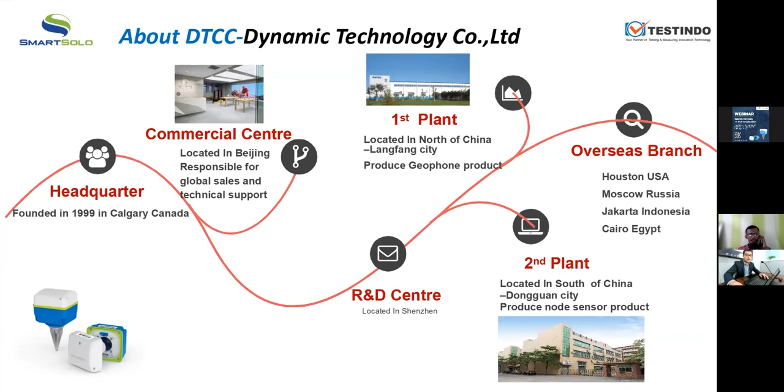The next page is about our product. What we supply is called nodal seismic sensor, and it contains different kinds of node sensors. The first one is IGU-16HR, a single 1C node sensor.

That is available to connect with external geophone stream products to match different kinds of terrain, like marsh or even shallow water. The last one is IMU3C, a new product we just launched this year. It also connects to the external 3C geophone stream product, which is popular for geotechnical survey areas.

The advantage of SmartSolo is they have three significant features. The first is being highly reliable compared to conventional geophone stream products. The second is low cost, much cheaper than the geophone stream product, the first generation seismic sensor product. The third is better HSE performance.

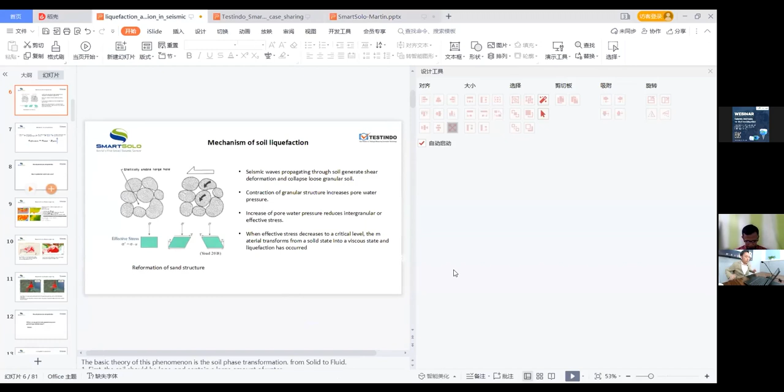Hello everyone, hello my friends in Indonesia. My name is Alan. I'm very glad to be here today to deliver my speech about introduction to seismic methods in soil engineering and structural health monitoring.

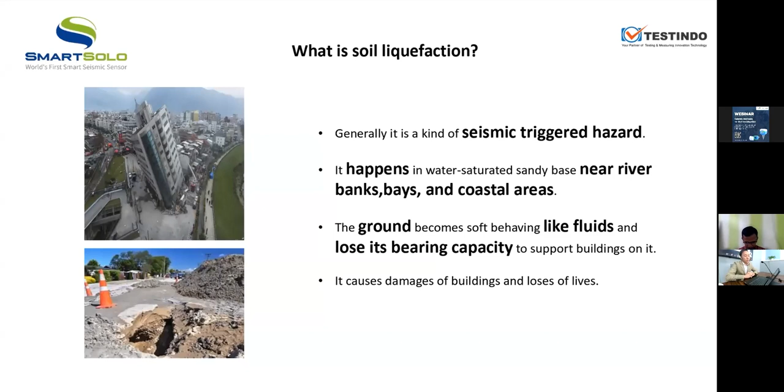Here are the consequences of liquefaction. Just imagine when you stand on the ground, and the ground suddenly becomes fluid like water — you will lose the support of the ground. What happens to you is what happens to all the buildings or structures on the ground. Here are several typical consequences led by liquefaction, like sand boil, flow failure, ground settlement, ground oscillation, and lateral slide. All these consequences lead to bad results for the structures on the ground.

So what is the mechanism of soil liquefaction? There may be many factors that affect soil liquefaction, but the mainstream view is that the main reason for the occurrence of soil liquefaction is that the effective stress goes down, and that it can be caused by triggering, like seismic waves.

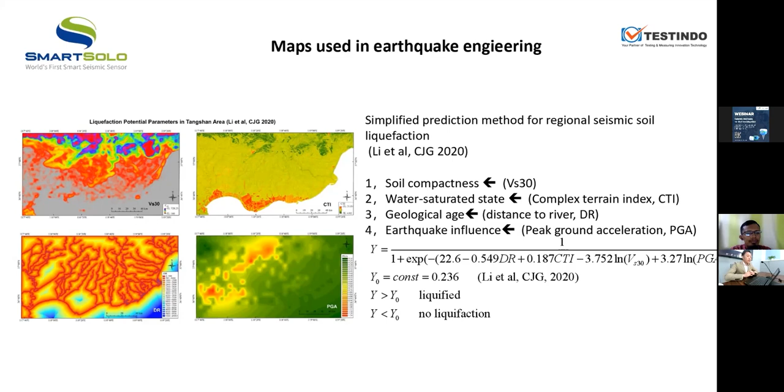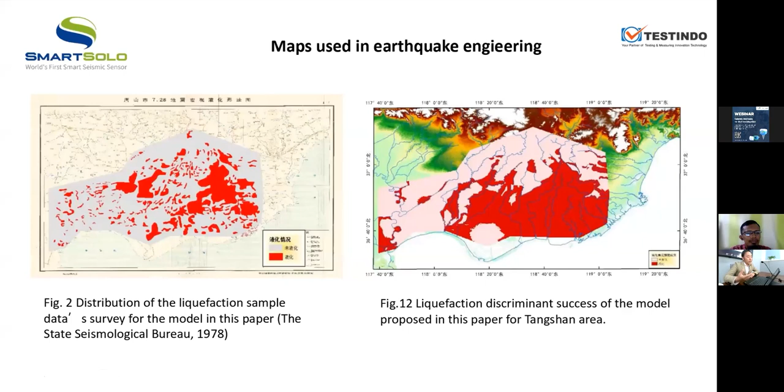Here's the result. The left picture is a study about the earthquake that happened in 1976, which caused a vast area of liquefaction. It represents the area which has experienced liquefaction. The right picture is calculated by the author with his methods. We can see clearly that the area predicted by the author complies with the real situation. So this method works well for us to predict the vulnerable area.

Here is another result. Here is a difference: the right figure is the real situation. The left figure is a prediction map calculated by the author with his method. We also can see that the prediction result corresponds well to the real situation, which again proves that his method is effective and efficient.

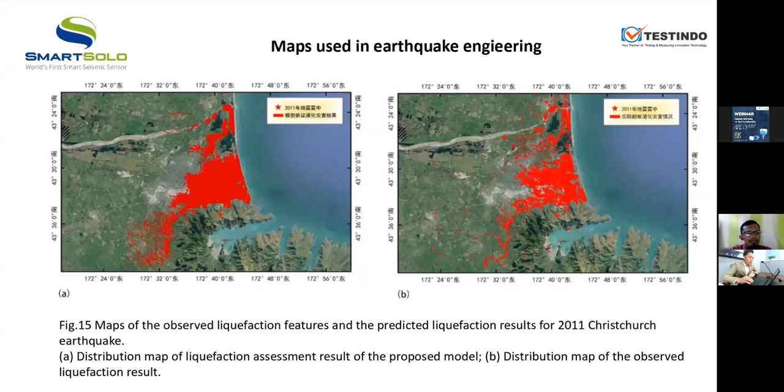So we already know that the author uses 4 parameters to predict the vulnerable areas. So how can we get these basic parameters used in generating prediction maps? My answer today is seismic. Here is a little derivation of the equations.

The first equation we have shown is that effective stress is equal to total stress minus pore pressure. And in the second equation chain, the very last one, tau means the shear stress. The capital G means the shear modulus, and the E means the shear strain. The mu is the Poisson ratio. So the shear stress is equal to the Poisson ratio times the effective stress.

Here we can conclude that the shear modulus is directly related to the effective stress, and that is influenced by the shear velocity Vs. So the variation of Vs can directly reflect the variation of the strength of the soil. It means if we know the distribution of shear velocity across an area, we'll have a good understanding of the strength of the soil.

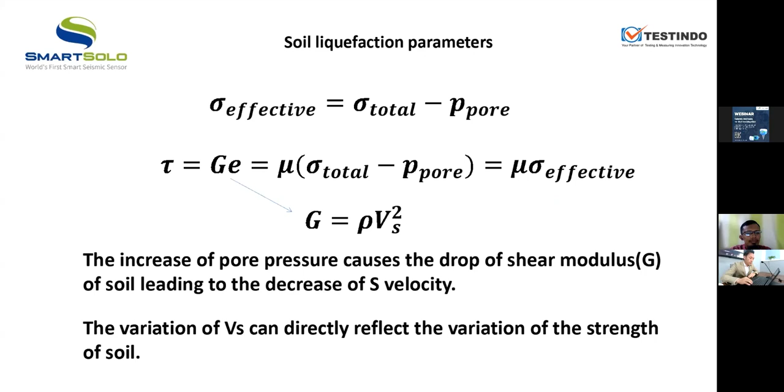Next, I will introduce some conventional methods to acquire soil shear wave velocities. Here are the conventional methods to measure the sand. We also call them in situ tests. We have many types of in situ tests like SPT, CPT, DMT, PMT. I think these methods are familiar to civil engineers.

To be honest, I'm not familiar with these tests, but the basis of these tests is to come to a specific spot in the field, drill a hole, put the equipment in the hole, measure that physical quantity, and then derive the parameters we want.

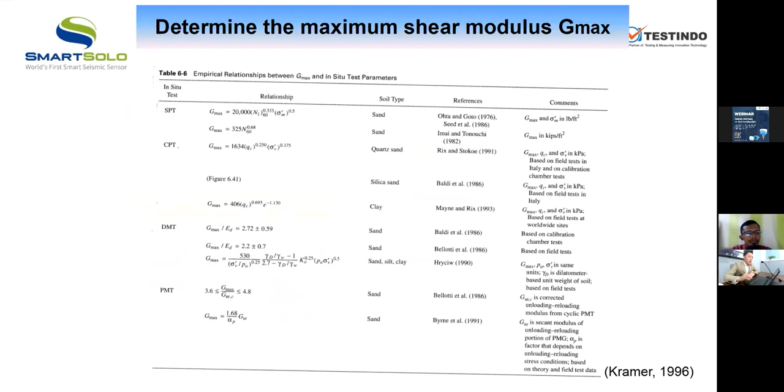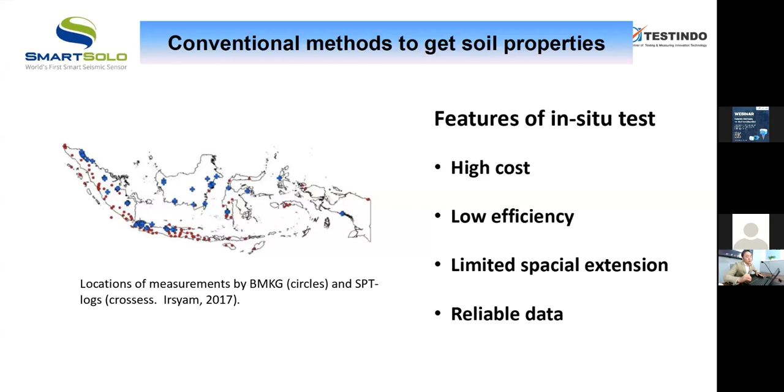The last one is reliable data. That's the most beautiful of the in-situ test features. The in-situ test can provide us reliable data, and that is very useful for us to verify the seismic profile. So what comes to my mind is that combining in-situ tests and seismic methods provides an efficient and cost-effective way to do soil property investigations.

Here is my economical equation. If we do some in-situ tests in some particular spots, that can provide quality control. And in other areas, we can implement large area nodal seismic investigation that provides spatial extent. Combining these methods together, we can have a cost-effective soil property survey solution.

Next, I will introduce mainly the seismic methods for acquiring soil properties, like the P wave velocity, S wave velocity, and also the layered model. I will mainly focus on the principles of these methods, and later my colleague Wei Hongyu will introduce some real applications. So I have three methods to introduce. First, surface waves.

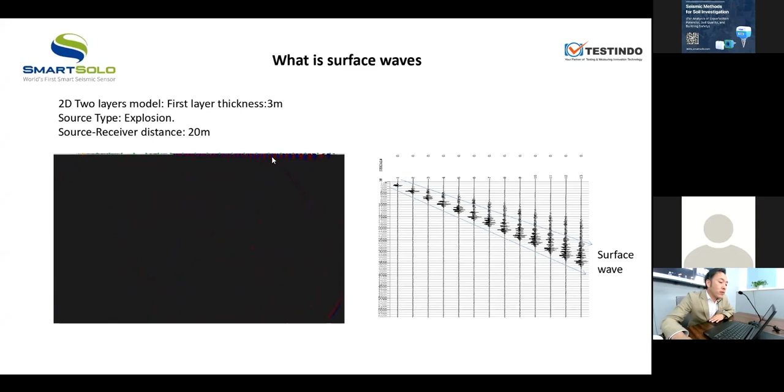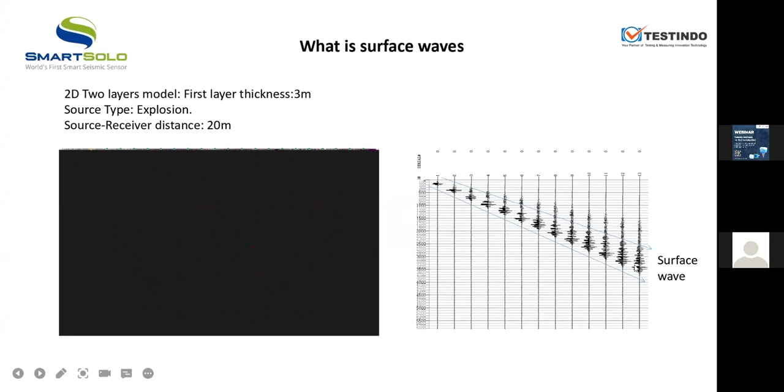The right picture is the seismic record. We can see the feature of surface waves is that it is the dominant energy in each trace, and as distance increases, the waveform extends in the time axis. Here I write up some features of surface waves. Wavefront: it is a cylindrical surface. Particle motion: an ellipse in counterclockwise direction. Amplitude: it decays with depth exponentially. Phase velocity depends on frequency. This is the main feature of surface waves, which we use to invert the S velocity.

The last feature is sampling in depth. High frequency samples the shallow layers. Low frequency samples the deep layers. Sample means it will be influenced by and record the velocity of those layers. In the bottom left corner, I show the decay of the surface wave amplitude with depth, and the right figure shows the particle motion form, which is a counterclockwise ellipse.

So in this slide, I want to introduce how we can get the S velocity from surface waves. Last slide, I mentioned that surface waves have a feature we call dispersion. So that's the physics we use to measure S velocity. So what is dispersion? Dispersion can actually be explained in the frequency domain.

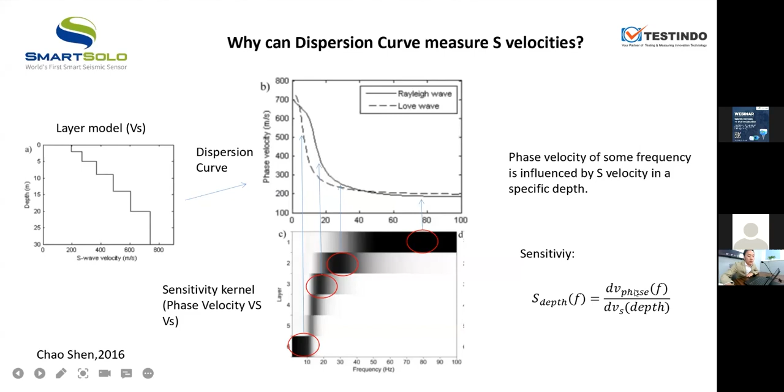Here, the sensitivity we calculate is the derivative of phase velocity over the S velocity at each depth. Here's a formula quite familiar to all of us. We studied it in elementary school. When we want to calculate the velocity of something, we need two parameters: one is the distance, the other is the time. Here, in surface wave methods, the distance is determined by the station geometry. The travel time is determined by the phase shifting measurement.

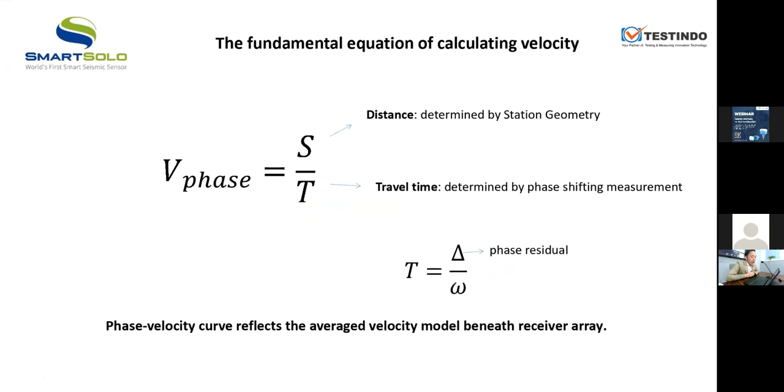Phase shifting measurement, I illustrate it in this equation. Delta means the phase residual. Omega means the angular frequency. So we can calculate the travel time of surface waves. The phase velocity curve reflects the average velocity model beneath the receiver array.

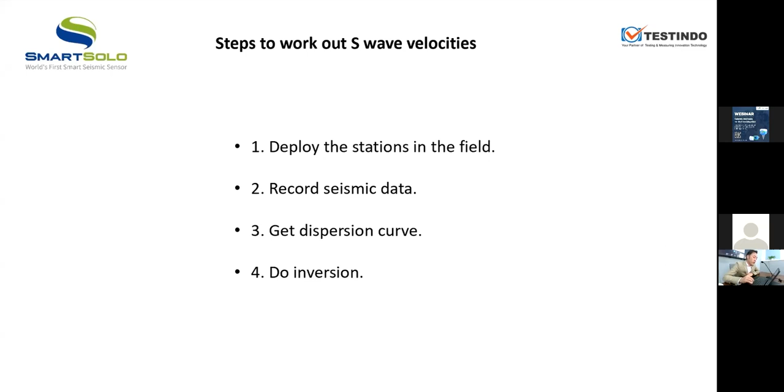Here are the concrete steps to work out S wave velocity. First, we need to deploy the stations in the field and record the seismic data. Then we collect the seismic data to the computer and calculate the dispersion curve. And last, we do the inversion job to get the final result, that is S velocity.

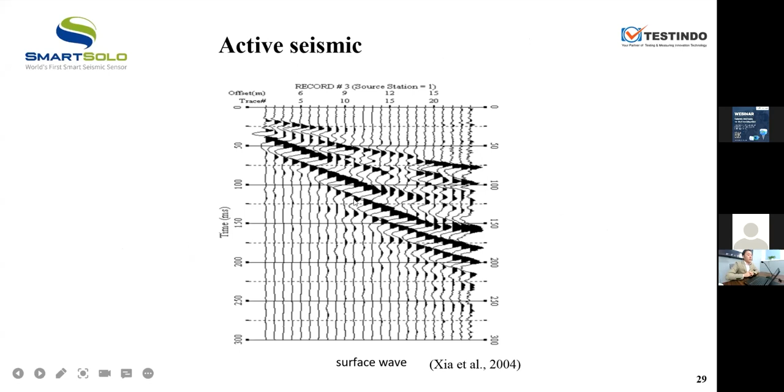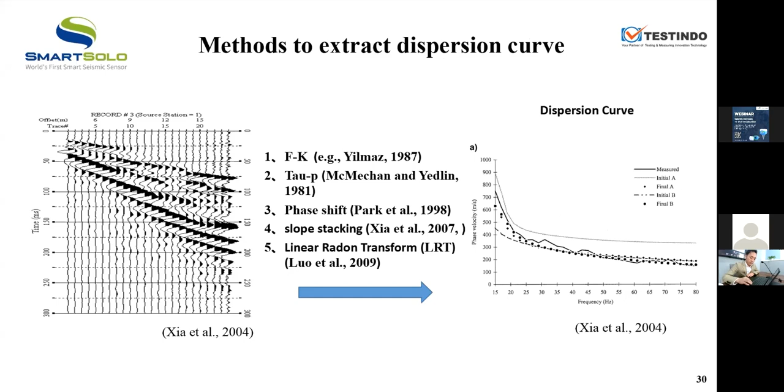There are many methods to extract the dispersion curve from active seismic data, and the basic idea is to measure the phase shifting of a specific frequency, and they can also be transformed to each other with some transform theory. I will not show the details here.

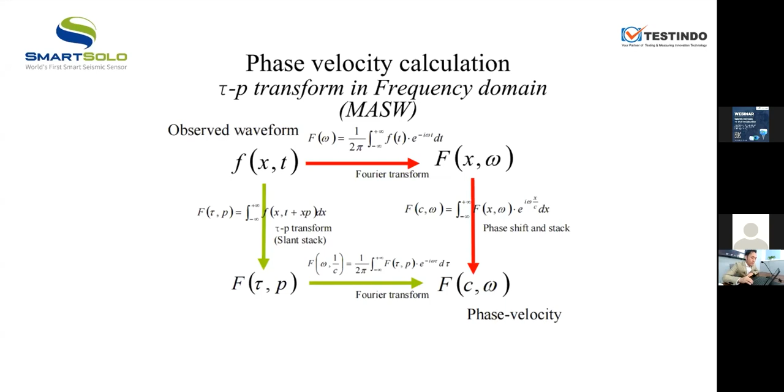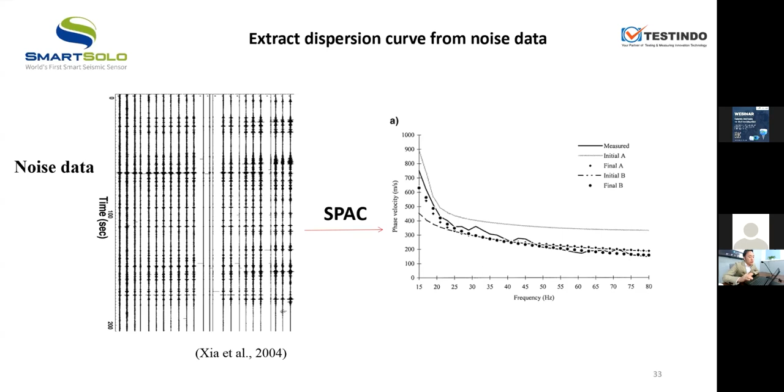How to extract the dispersion curve from noise data? Apparently, we cannot see anything in the noise data. It's just like a random addition of seismic energy. But in fact, there are many surface waves in it. Generally, we use the SPAC method to extract the surface wave dispersion curve. Here's a brief introduction to the SPAC method.

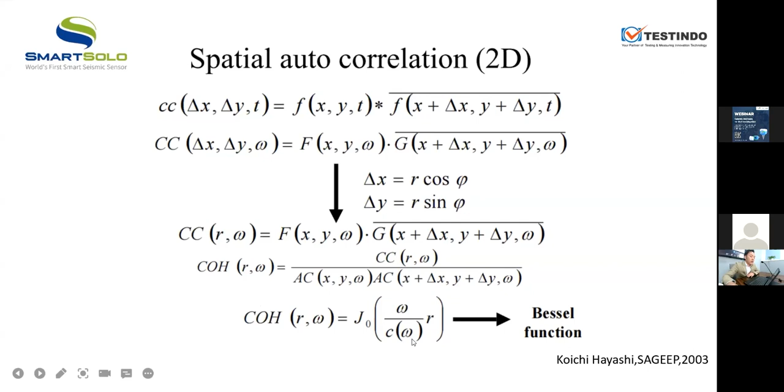The basic idea is to calculate the coherence curve with stacking of the data. And the coherence curve is equal to the Bessel function. The independent variable of the Bessel function contains the dispersion information. So by comparing the observational coherence curve with the theoretical Bessel function, we can derive the dispersion curve.

After we get the dispersion curve, how can we get the S velocity model? That is the theory related to inversion. Here we have a layered model with multiple layers, and in each layer we have physical quantities like S wave velocity, P wave velocity, rho, that is the density of rock, and H, which means the thickness.

Generally, these parameters can be related to each other, and we can write them within a function, an implicit function here. And here we define CR, the phase velocity, as the dependent variable, and all the other parameters are the independent variables.

The first step is that we calculate the sensitivity of the dependent variable, phase velocity, over all other parameters, that is the independent variables. I will also call these derivatives the Jacobian matrix. Second, we build a linear system. J means the Jacobian matrix.

Delta X means the model disturbance, and the delta B means the data residue between theory and observation. At last, we should do model updating. That is based on

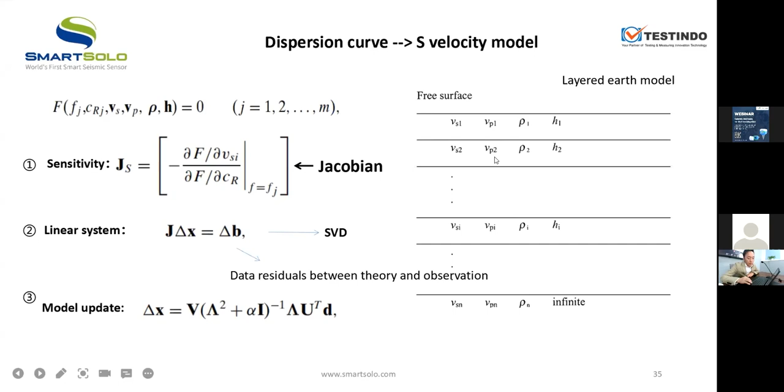Here is another application of surface wave methods. It is an application to do a survey of the river bank. Here I want to mention that in the upper figure, we have 4 drillings, and with the drilling test, we can have a good verification of the S velocity we get from the surface wave methods.

And under the verification of the drilling test, we will have much more confidence in the areas without drilling test. That's the fundamental strategy for geophysics, for the seismic exploration, to solve the issues of multiple solutions. And that is also the soul of the seismic exploration.

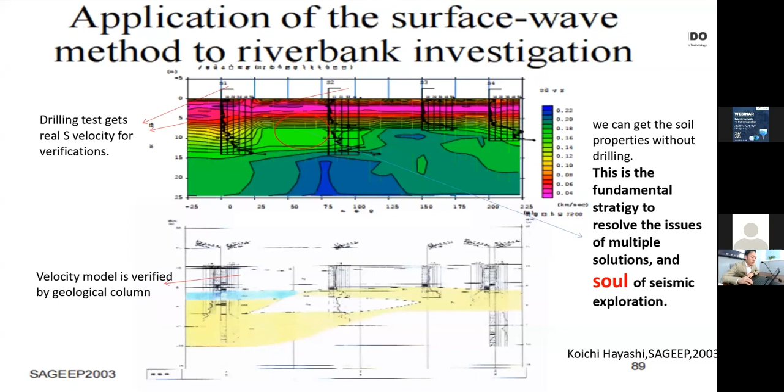Next, I'm going to introduce refraction. Refraction is also a geophysical phenomenon. It can help us to get a near-surface P-wave tomographic velocity model. Here is the field geometry. It's similar to the surface wave. We need a hammer or a weight drop. Also, we have a linear array.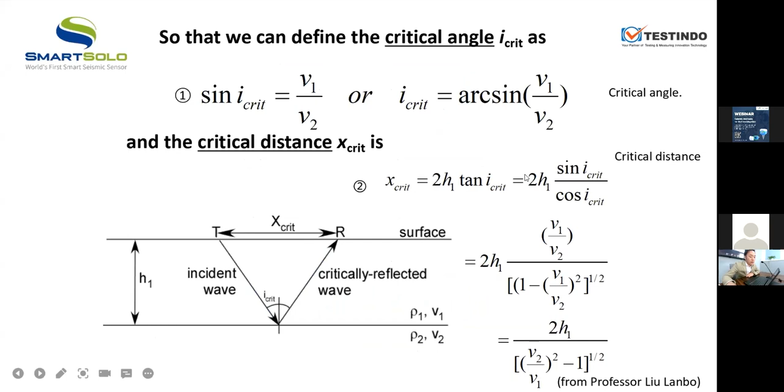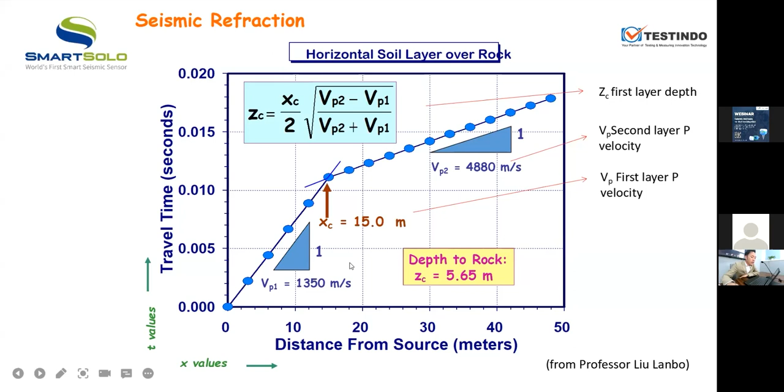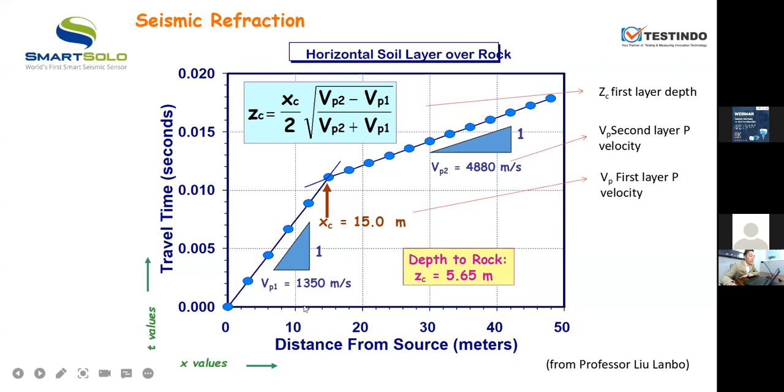Here is a figure I want to illustrate how we can get the properties of each layer. Here we have two layers, and we can see from the left bottom there is a straight line, which we can calculate the slope of, and that is the velocity of the first layer. And also we can have a second straight line. The slope of that line is the velocity of the second layer. And from the cross point, we can calculate the critical distance. With all these three parameters, we can calculate the thickness of the first layer.

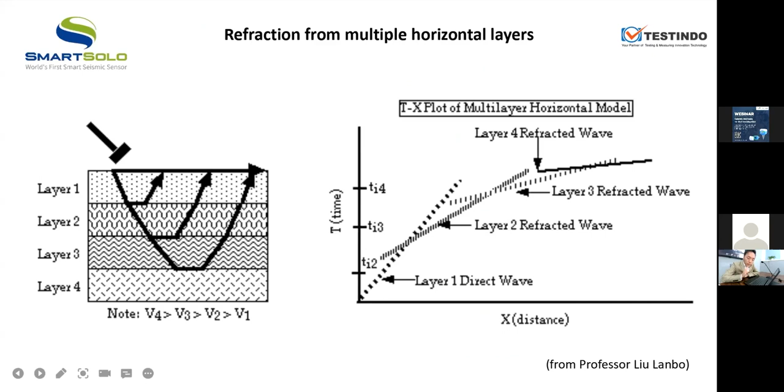Here is a real project, which we will use to illustrate the method we just derived. In the left one, we can see the red line is the picking of the travel time of the refracted wave, and based on this red straight line, we can calculate there are 3 layers, and we can also calculate the thickness of each layer and their P-wave velocities.

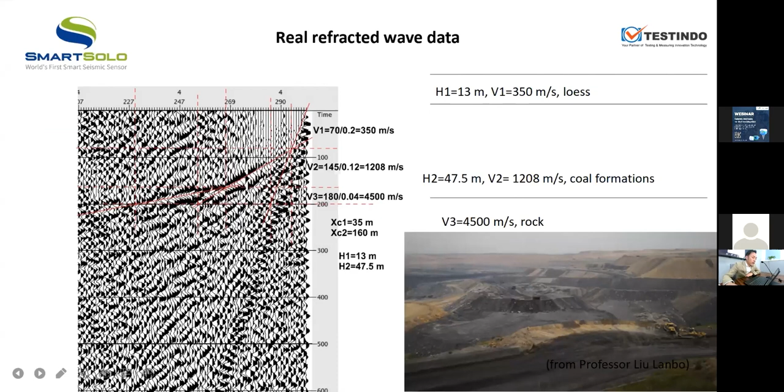Here, I want to deliver just a little theory about ray-based travel time tomography. Actually, with the method we just mentioned, we can have a good estimation of the properties of each layer, like P-wave velocity, thickness, and other information. But if we want more, we can go further. That is ray-based travel time tomography. It can give a smoother model. And the basic theory of tomography is like this.

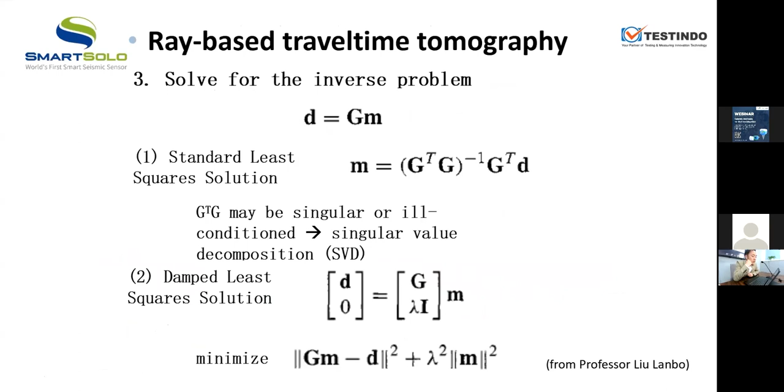Same as the method of inversion of surface wave velocity, we can use many methods to update the model. For example, standard least squares solution, damped least squares solution, and also iterative methods. All these methods suit different situations of the problems.

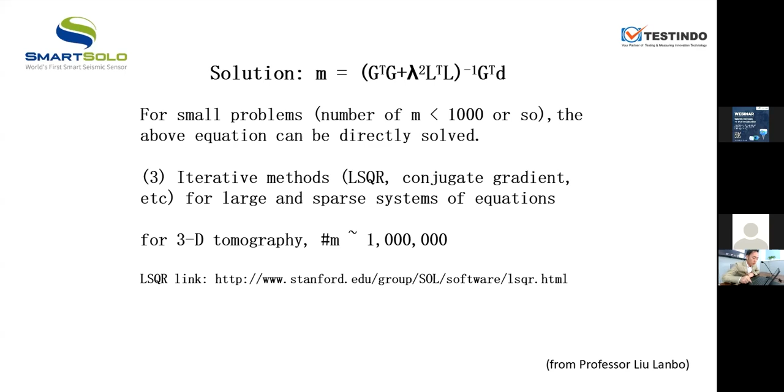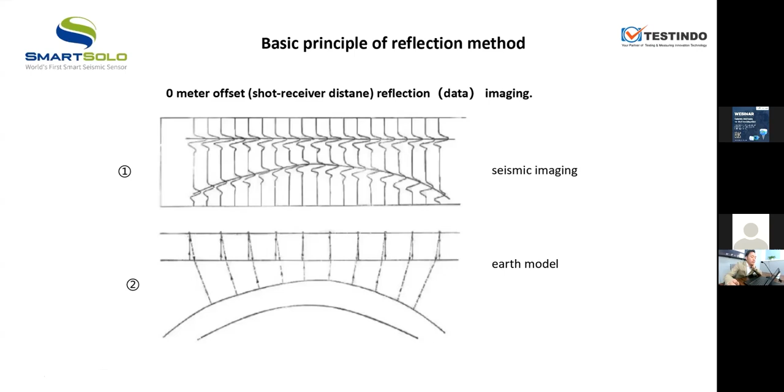That's our ideal situation. In reality, it's not effective and efficient if we do it that way. In a real project, we use multiple receivers to record data from a shot, and data are generally gathered in shot gather, like this figure. So directly, we cannot get the zero meters offset data.

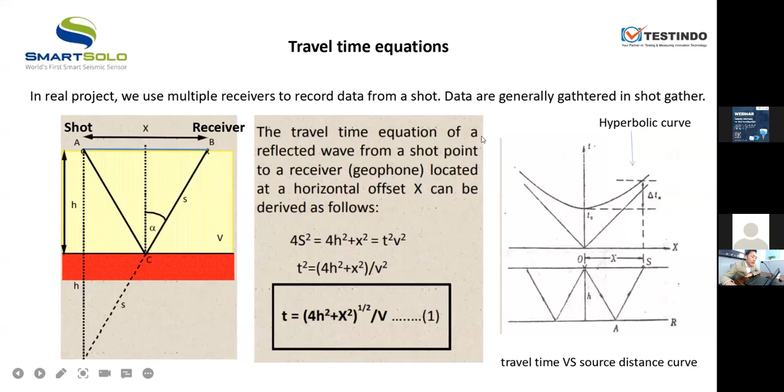Here's the static corrections. In this process, we use the refraction tomography result, the p-wave velocity, to correct the raw data. Here, the line ups - after the correction of the statics, the line ups look like a straight line. That's the ideal situation. Then we do velocity analysis.

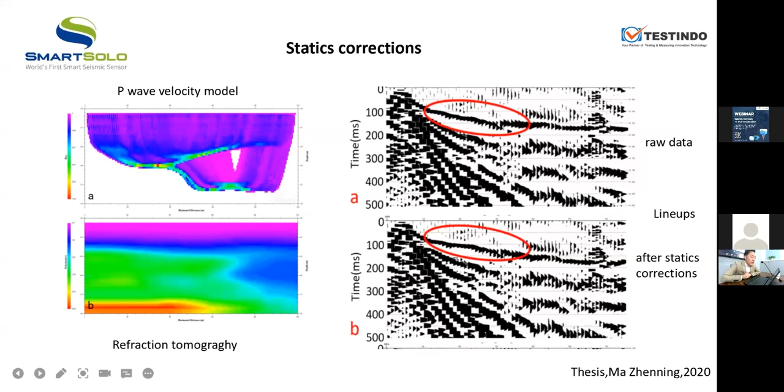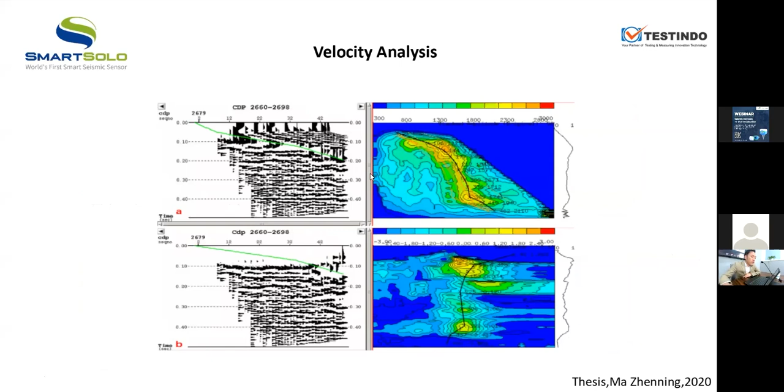Here's the comparison between reflection and refraction. There are many differences between them. Typically, I want to mention here the vertical resolution and lateral resolution. They are different, and also maybe what we concern most is their relative cost. The reflection method costs much more - it can be 3 to 5 times the cost of the refraction method. So the refraction method is more suitable for some small projects with limited cost. But if you have enough money, you can do reflection exploration.

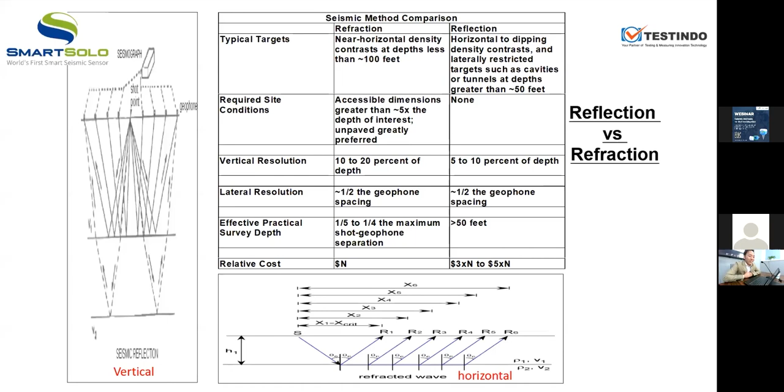This next part is about structural health monitoring. Nowadays, with the rapid development of cities, we have many big structures like bridges and tall buildings, and the monitoring of their health is quite important to the governors. Structural health monitoring involves observation and analysis of the system over time, using periodically sampled response measurements to monitor changes to the material and geometric properties of engineering structures, such as bridges and buildings.

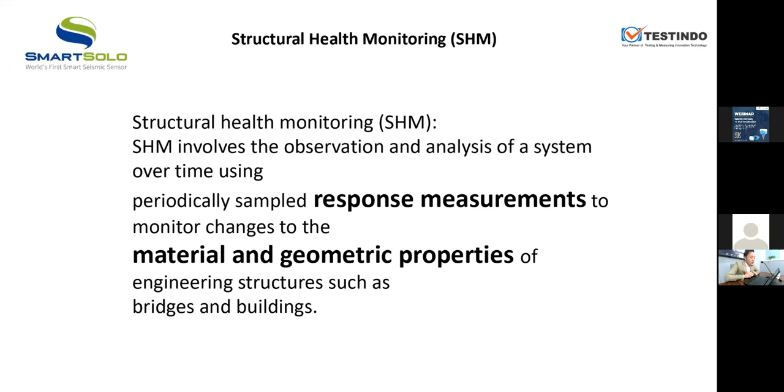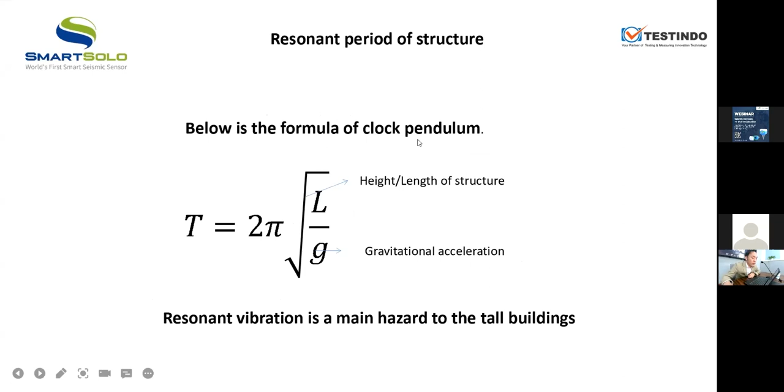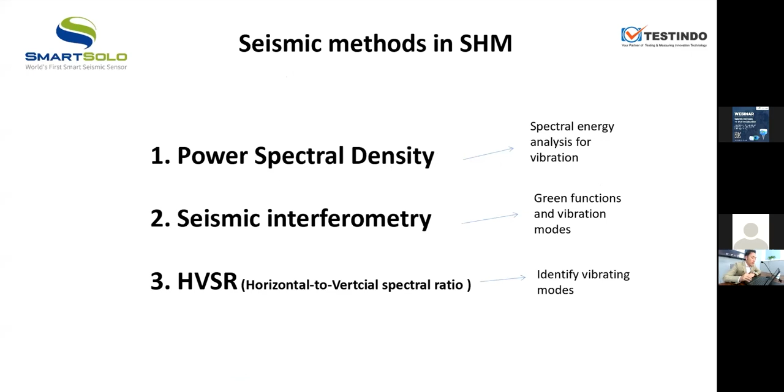Typically, the resonant vibration is the main hazard to tall buildings. Here we can calculate the resonant period of a structure. Here is the formula we use to calculate the resonant period of a clock pendulum. We can also deploy sensors in the building to record vibration data, and we use the sensor data to analyze how the structure is influenced, how the structure vibrates. We have three aspects we can derive from seismic data: power spectral density, seismic interferometry, and HV ratio.

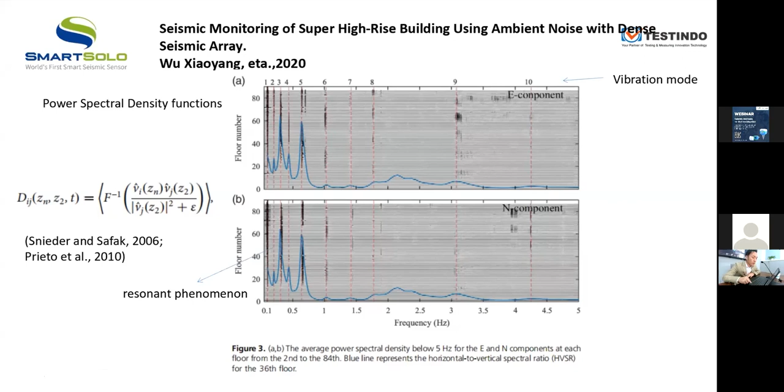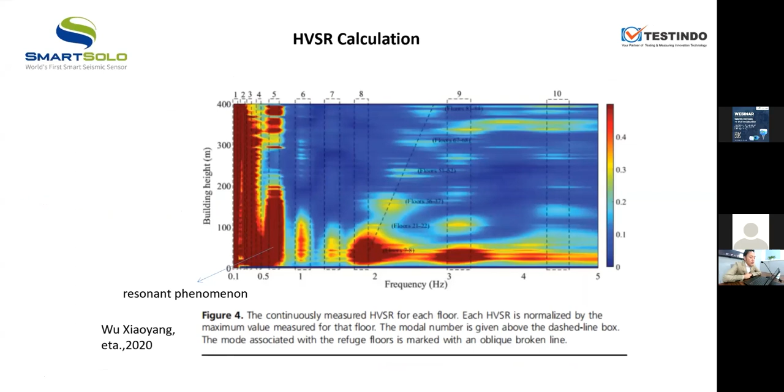Here's vibration modes under different frequencies, from low frequency to high frequency, and we can see the vibration mode clearly shows how the building vibrates. So what can we get from the seismic method for structural health monitoring?

Ground vulnerability, individual building structural vulnerability, and site effect, vibration modes, propagate wave velocity, rotation, and twist—all these properties we can get from seismic methods. All these properties provide a thorough understanding of the state of the structure through time.

Here's my last slide, a summary. Today I showed three seismic methods to investigate soil properties. For the surface wave method, we can get the S-wave velocity model, directly related to soil stiffness. For the refraction method, we can get P-wave velocity, which helps us get information about water saturation. The reflection method also helps us understand the layered structure of the Earth, and helps us identify faults underground.

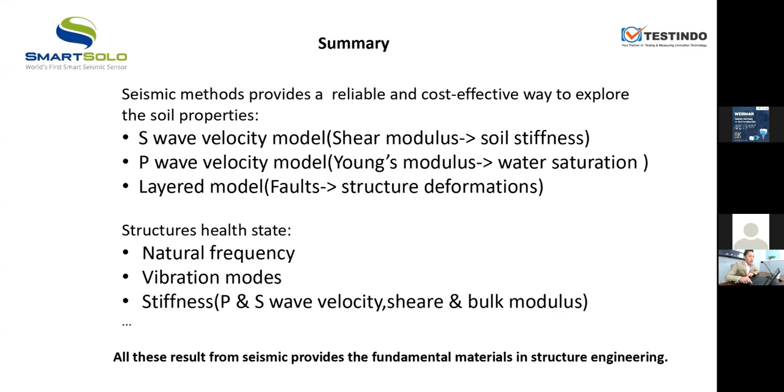That's all. Thank you for listening, and I thank all the people for their work on today's activity.

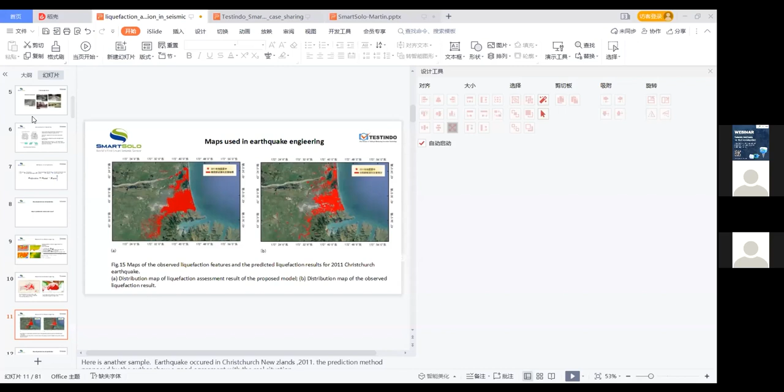If you can see my screen, for the comparison between the two figures, the researcher successfully predicted the vulnerable area with his method. So the accuracy actually depends on the parameters used, how accurate those parameters are, and the typical empirical equations used.

There are many empirical equations researchers use to predict vulnerable areas. What I used here is according to a researcher from China, whose paper was published in 2020 in CGG. Typically it depends on different situations, but I think the accuracy rate is about 70 to 80%.

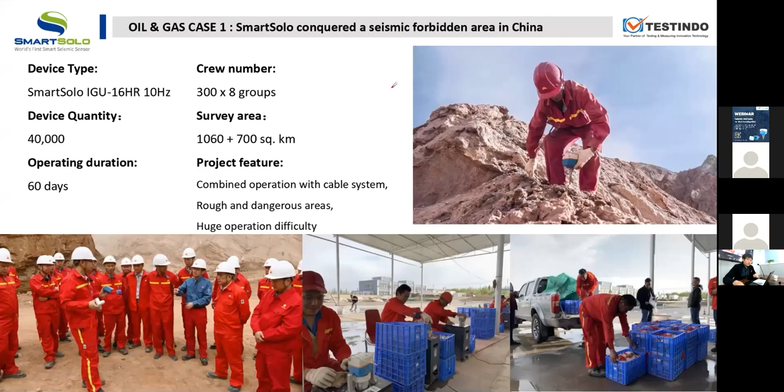Smart Solo conquered a seismic forbidden area in China. We call it a forbidden area because the terrain is really rough and dangerous here, bringing huge operation difficulty for the crew. Considering this condition, the crew decided to use Smart Solo in this rough and dangerous area because it is cable free, and used their old cable system in the flat area. From these pictures, you can see how crazy this place is.

You will find a helicopter here because it is in charge of transporting people to unreachable positions. Even in this rough and dangerous area, Smart Solo also guarantees very good data recovery rate. The designed receiver points are more than 150,000, and we still give a data recovery rate of more than 99.60%. Here is the combined shot gather with Smart Solo and cable system - the data combines very well, with no phase delays, no time delays. The client estimated the project would take more than 100 days, but the crew finished it in 60 days, saving more than 40 days' costs. Compared with historical projects, the efficiency increased about 70%.

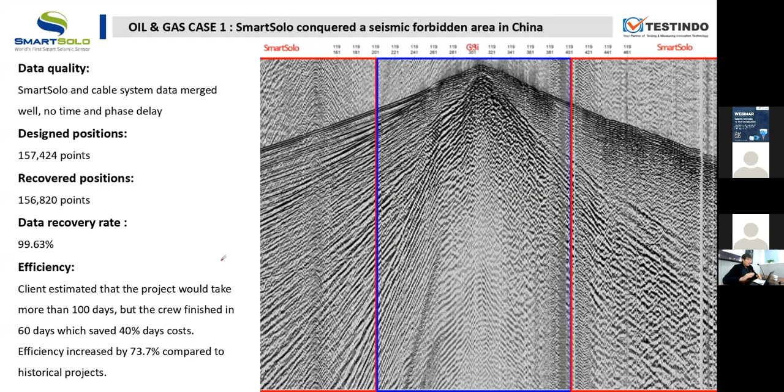The second case is from Australia. A new technology called compressive sensing is applied in this project. Compressive sensing allows the crew to acquire very high dense data but with a small count of devices. The source and receiver intervals are not fixed - it's randomly from 4 to 16 meters in the compressive sensing project. I said randomly, but actually it's calculated.

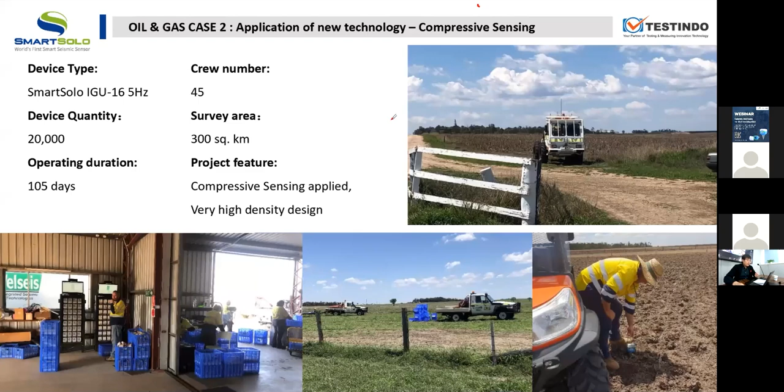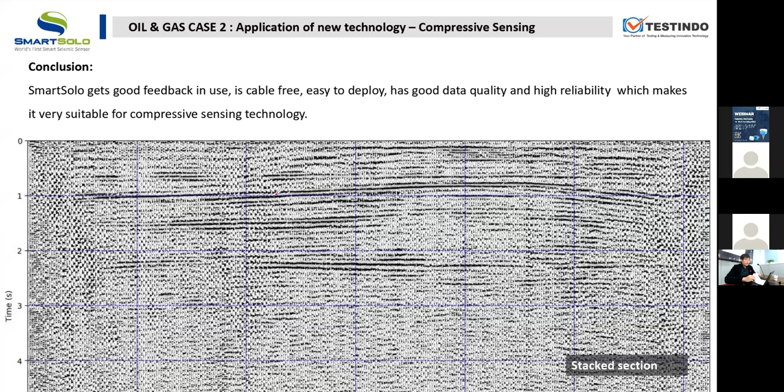I know you may not be interested in oil and gas explorations, but what I want to express from these cases is that seismic instrument technology has improved a lot in terms of efficiency, cost saving, flexibility, and data quality. These features are also very important in engineering applications.

The next title is coal mines and geothermal resource exploration. When we talk about these explorations, they use a similar method - active source reflection, similar to oil and gas reflection, but at smaller depths and scales. So I prepared some special cases using the passive method. The first case is shared by IMS, one of our clients in Australia.

IMS is an institute that's studying the seismic rock mass response for mining. And they are very good at using the passive method to investigate the underground structures. The passive method uses the ambient noise from everywhere, from any sources, such as motor vehicles, tides or wind,

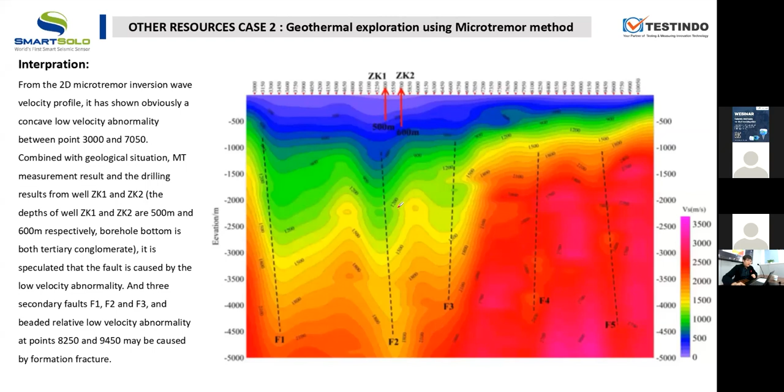And the next case is fracturing monitoring of geothermal production. I'm not sure if you remember, in 2017 there was a serious earthquake disaster in South Korea. People were injured and property was lost. There was the first earthquake and then another earthquake followed. And there's a saying that the second earthquake was caused by fracturing during geothermal production. No matter if it is true or not, after that, more and more attention has been paid to fracturing monitoring.

And when we talk about monitoring, it always means real time or near real time. So in this case, a new generation of SmartSolo product called IMU was applied. This product is equipped with a mobile network module, which allows the device to upload the data to a cloud server in real time. And these devices are radially distributed around this fracturing well.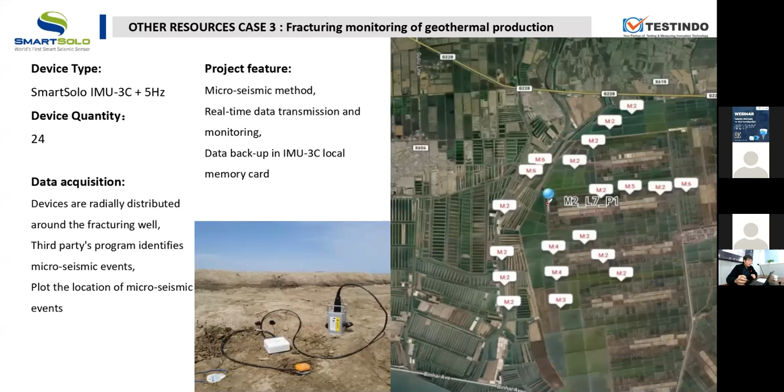According to this data record, another third-party program identified these microseismic events. There are thousands of microseismic events that occurred during hydrofracturing. This program identified these events and positioned them on the plot. And this result will guarantee the fracturing production works effectively and safely.

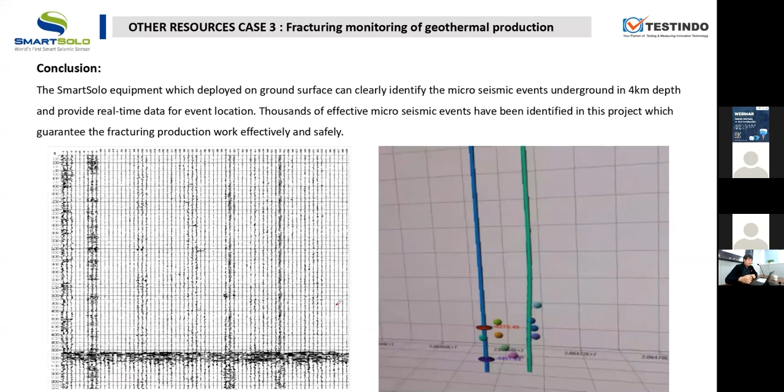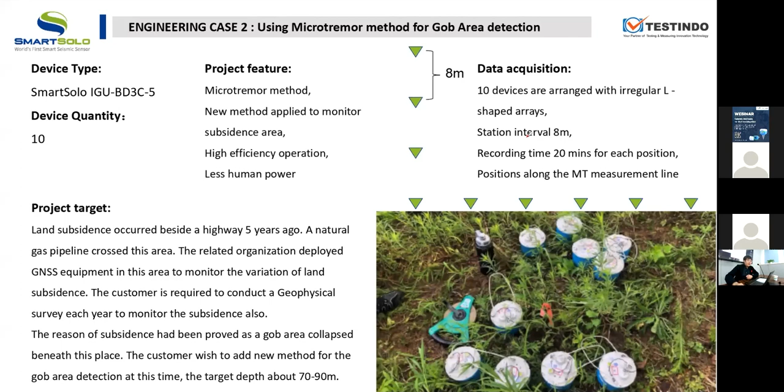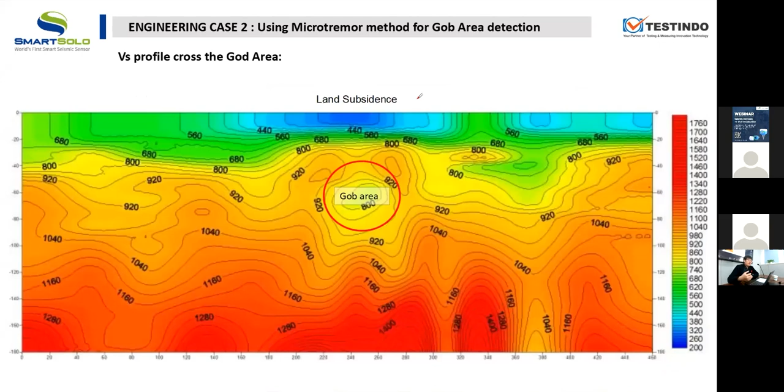But these human activities become a very good source for passive seismic. So the customer used passive seismic, and they separated 24 devices into 4 groups, and each group is arranged in a pentagon-shaped array with one in the center. So 6 devices, 1 array. They can do 4 arrays at the same time. The station interval is 3 meters, and the position interval is 5 meters, which means they are looking for something shallow, maybe just 10 to 20 meters deep.

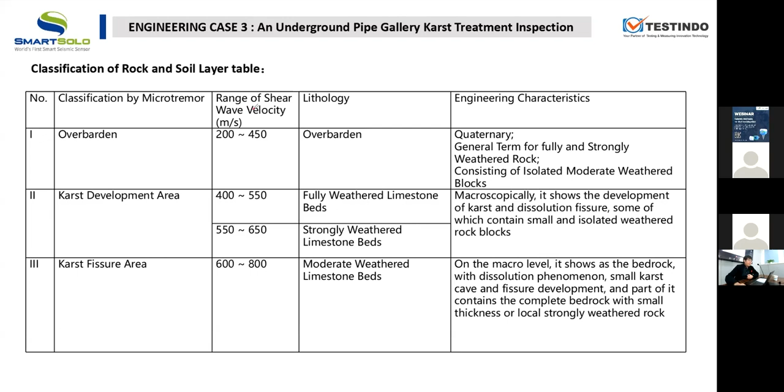And here's another classification table of rock and soil layers. We can find the relationship between lithology and shear wave velocity, and this will help us interpret the profile. And here are 2 profiles. The blue color means very low velocity, the sedimentary cover. And under the sedimentary cover, you will find some light blue, which is a low velocity anomaly. And the customer just marked them out as suspected karst caves.

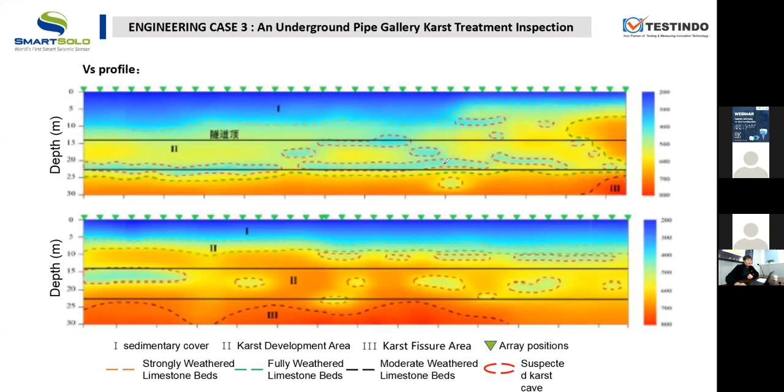Case number 4 is a little special. They're looking for civil air defense engineering, which is similar to a void underground. The customer contacted us because they were carrying out a project, and there was a known air defense engineering position. So they wanted to do some microtremor survey lines as a test, to verify this method. We provided them devices, and they tried two kinds of arrays: triple triangle arrays and linear arrays. Both array results show a low velocity anomaly at the same position, and that's exactly where the air defense engineering is.

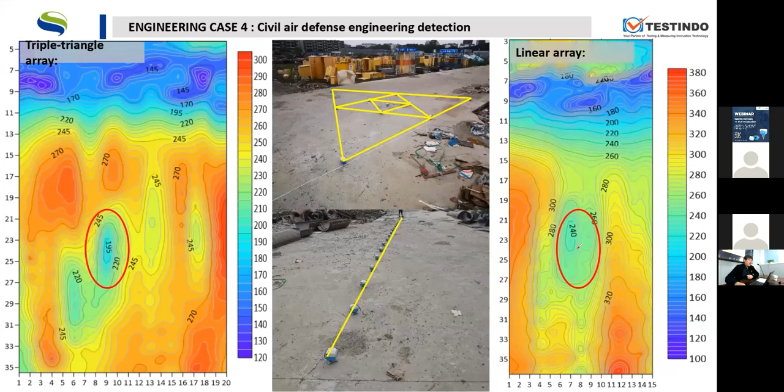Besides these engineering or exploration cases, we still have some scientific research, which is really interesting. The first case is estimating seismic vulnerability in South Korea. The town of Haenam in southwest Korea lies partly on reclaimed coastal land and experienced an unprecedented earthquake swarm during April and May 2020. The town was destroyed in some places, and the government wants to build a new district. But evaluating the seismic vulnerability is very necessary before they rebuild here.

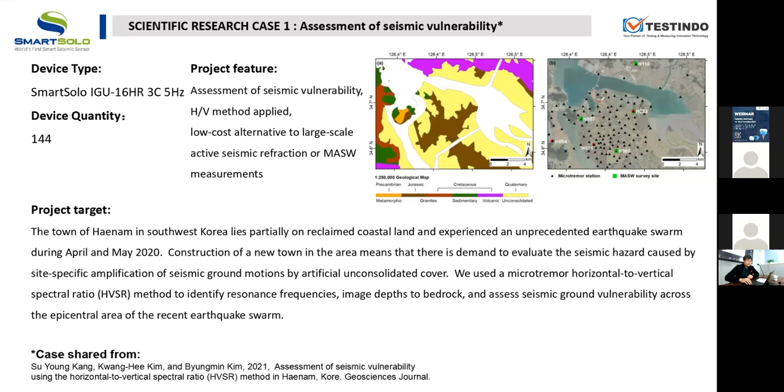And after a long time of microtremor data acquisition, they can do some data processing and extract the H/V curve from the microtremor data. And here are 4 figures showing different types of the curve. The first one is a single peak, and the second one is multiple peaks. The third one is a single peak, but at higher frequencies. And the last one, there's no peak.

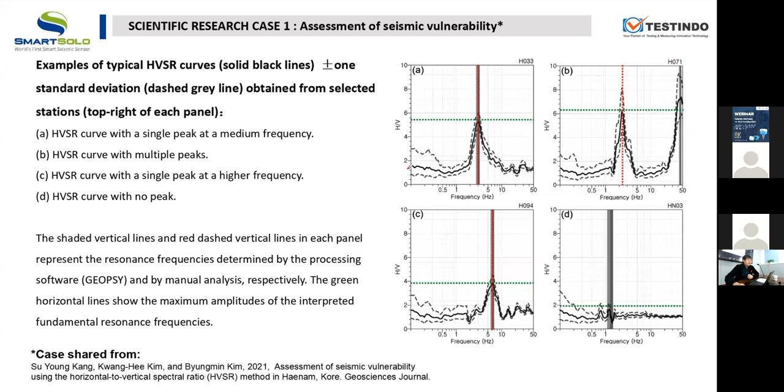And the frequency at this peak is the fundamental resonance frequency that we want to investigate. According to the resonance frequencies, we can calculate the depth to bedrock in this area. And we input these depths to a program, and with a lot of parameters, we can calculate the ground shaking vulnerabilities. And as you can see, the blue color means low vulnerabilities.

So the government planned to build 3 new towns here, here, and here. So that's all for this case.